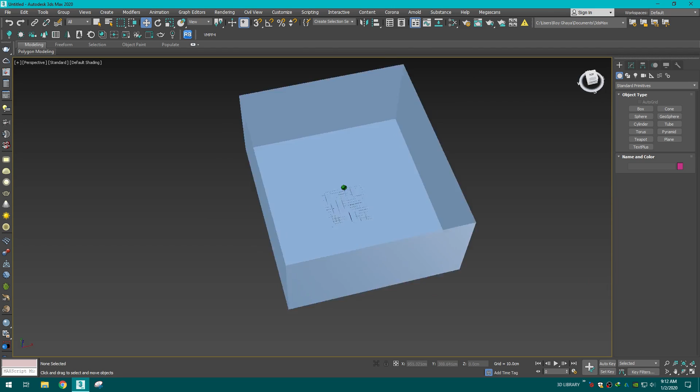Okay, so to my downloads, and of course I'll be leaving all the links for you to download all the materials and all the models that I'll be using in this video. I'm gonna grab the free bed here.

Make sure angle snap tool is on. You can press A on your keyboard, E for rotate, and we're gonna rotate this for 90 degrees. And of course group it to bed.

Now to our camera here, we're gonna select Corona camera and align it. Press Shift F on our keyboard to enable safe frames, so I can see the frames that I'll be setting for the camera. Make sure Corona renderer is set, and go to common, and let's have some space in our image.

We can see here that our camera is very close to the bed, and we don't want that. We need more space for our interior so we can show our full space. So we're gonna go back to our camera, select our camera here.

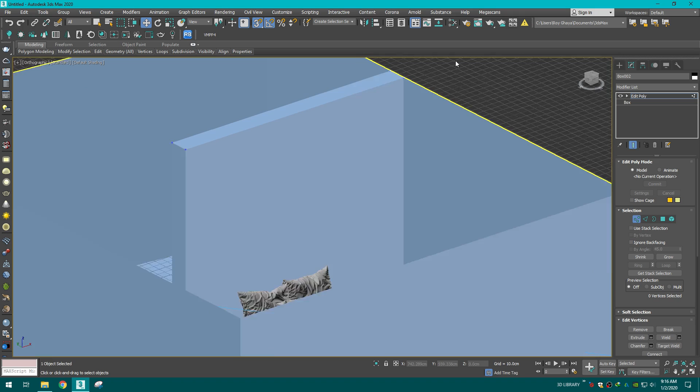So we're gonna select the vertices here and align it to the top, and those vertices here, I'm gonna align it to the edge here. Now we can see that it's perfectly aligned, and we're gonna make this a little smaller, something like this.

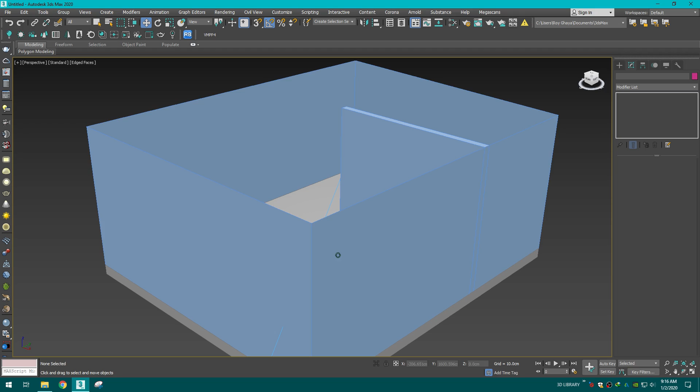Now we're gonna need some openings here, and before we do that, we're gonna detach the floor. Let's name it floor. Select it, and let's shell this floor to something like 20. Assign a different color for it, and a different color for the wall.

Now we need some openings here. So I'm gonna grab those edges here, connect them. Let's say we need 3 of this. And this one would be a little smaller here, and leave some space for the wall. So I'm gonna grab the first one, second one, and third one.

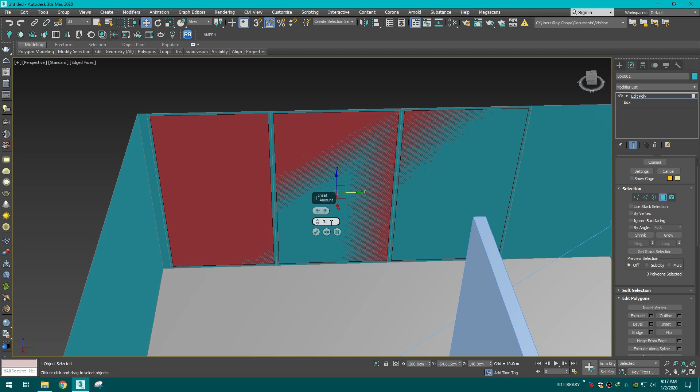And I make sure I inset by group, so I have to hit this button here. And let's inset to something like 3.75, let's say, and hit OK. Now we're gonna extrude them to something like 10. And of course, delete them.

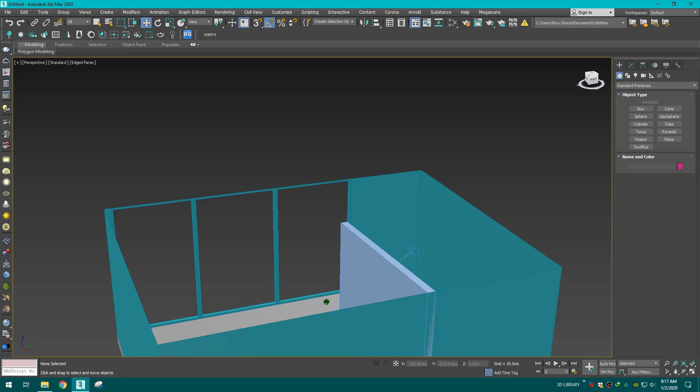Now we have some openings and the basic model so far. We're gonna copy this to make the roof. So we hold Shift and drag it up. Make sure it's a copy and align it.

Now I need an opening here for the curtains, so I'm gonna grab an edit poly. It's not necessary, but sometimes I like to have more control of it. A box above the openings here. Make sure the box is way above, but it doesn't touch this or go beside it. So it's gonna be something like this. You can see it from the interior here.

Now we go to compound objects, select Boolean and subtract, so we can remove this box here and select it. Now from the front view you can see now that we have an opening in our roof. Let me isolate this so you can see it clearly.

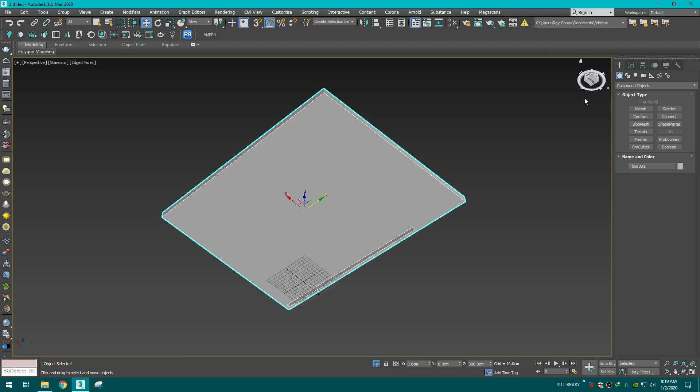This is our window openings here, so they can fit inside. Unhide all and back to our camera angle. Let's delete the box, of course, and make sure we save.

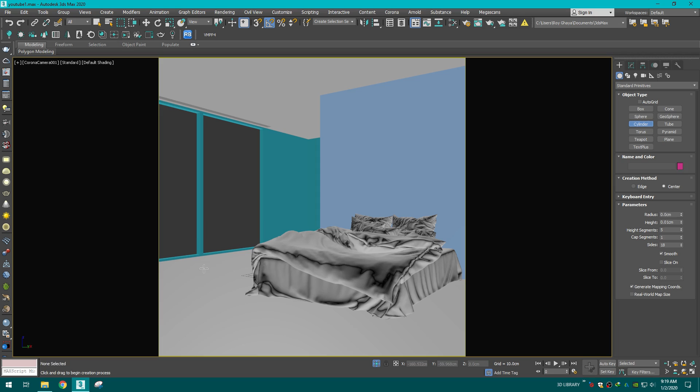Now I'm gonna select cylinder here, and let's make a cylinder. And move it to here and copy another one as instance to here. Maybe a little further, something like this.

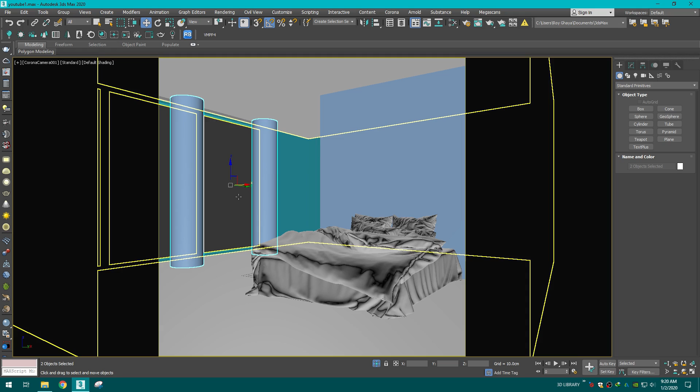Alright, and of course make sure they align to the wall, so we're gonna edit poly, select the vertices, press S to snap, and align them to the wall here.

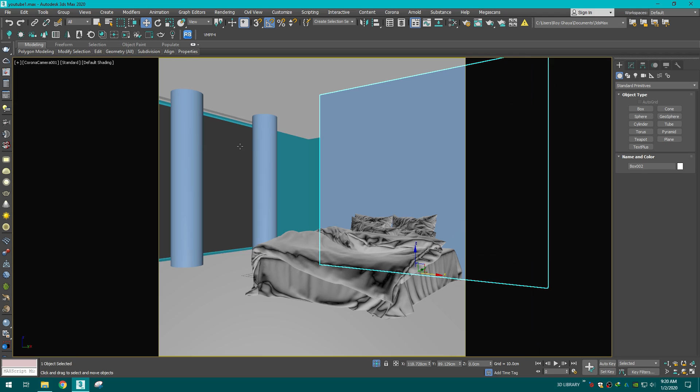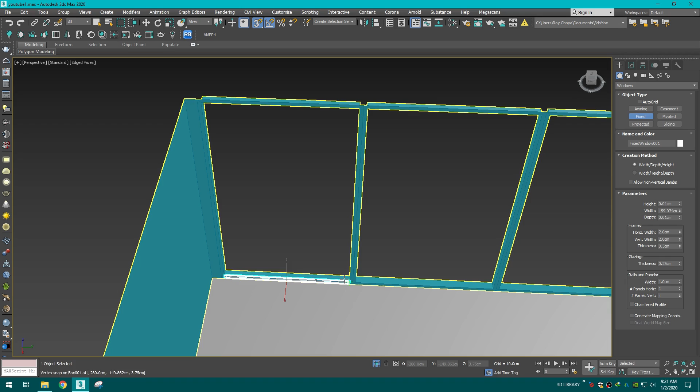Now we have our basic model, but we're missing the windows. So we're gonna hide the roof, hide those two, go to Windows, select Fixed, make sure Snap is on, and we're gonna create the windows here. And here we have our 3 openings.

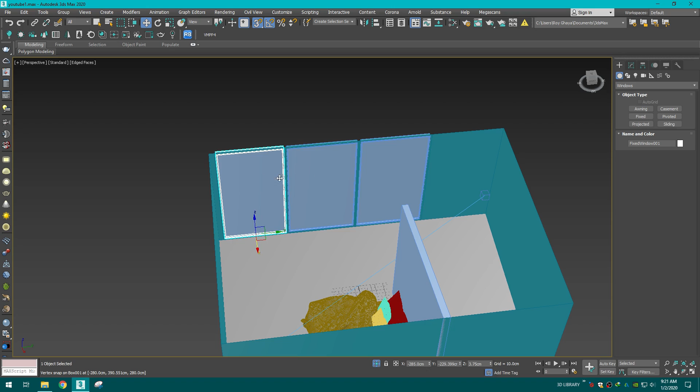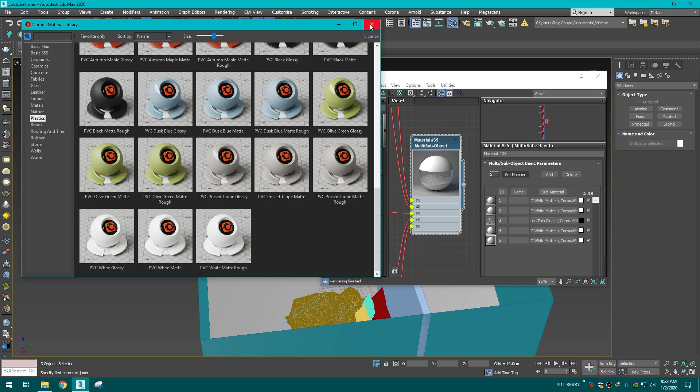Now I'm gonna select those windows here and go to my material editor to assign the material for it. So we're gonna grab a multi-sub object, set the number to 5, and go to our material library here from Corona. Go to the glass, assign a thin glass material to number 3, and go to plastic, assign a PVC white matte to number 1, 2, 4, and 5, and assign this material to our window. And of course UVW this to box real world scale.

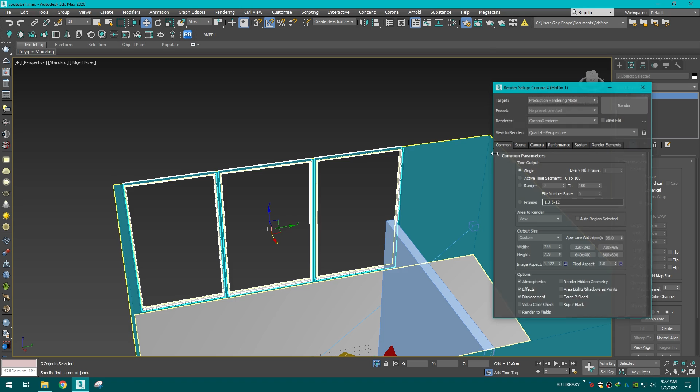Alright, now before we start the interactive and set up our light in our scene, we need to exclude the windows from the material override. So to our render setup, we press F10, go to scene, select material override, and select a basic Corona material, and hit the plus button here to exclude our windows so light can go inside our scene.

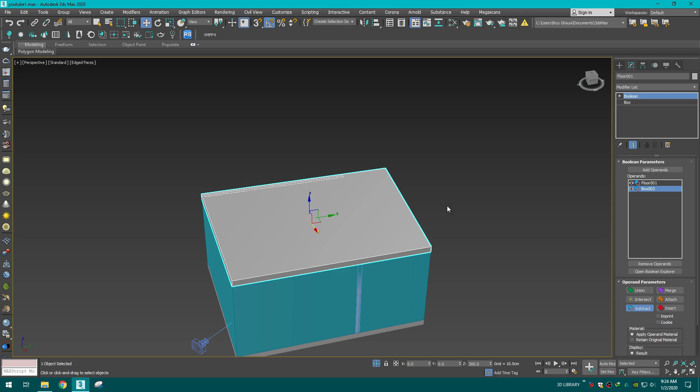Alright, so this model is from CGMood and I'll be leaving the link of course for you to download. And we're gonna merge it in our scene and delete the ones that I don't need, so we won't be needing those. I'm gonna be needing this one only, but I'm gonna change the materials from the Corona material library to a curtain material, so we're gonna select this one here.

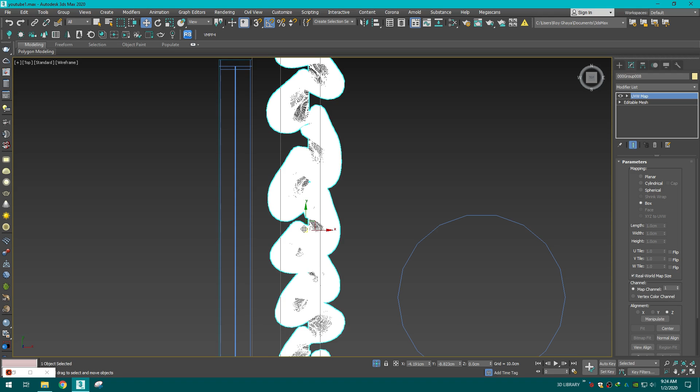And make sure of course to UVW this as real world scale. Now move the curtains to here, okay, and in front view make sure they're perfectly aligned. First let's align them to the floor so they won't be flying. Set position to minimum and maximum.

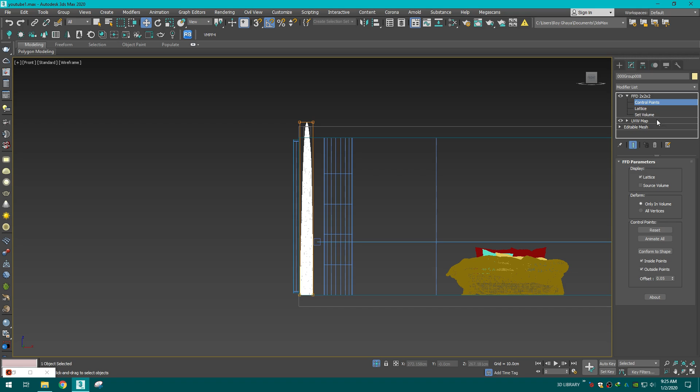Okay, unhide all and make sure you FFD this to 2x2. Select the control points and move them down the opening correctly. Alright, now we can copy this as much as you want. As a copy, let's say.

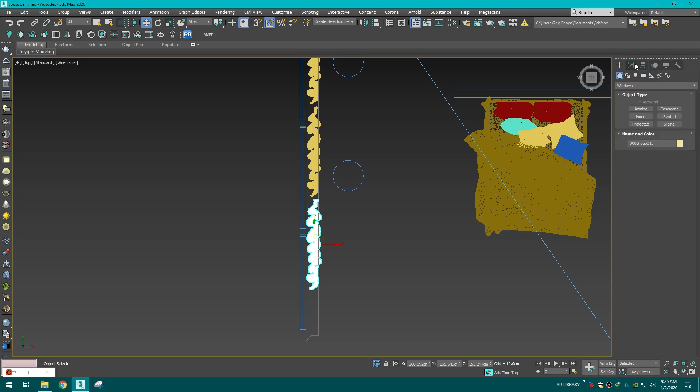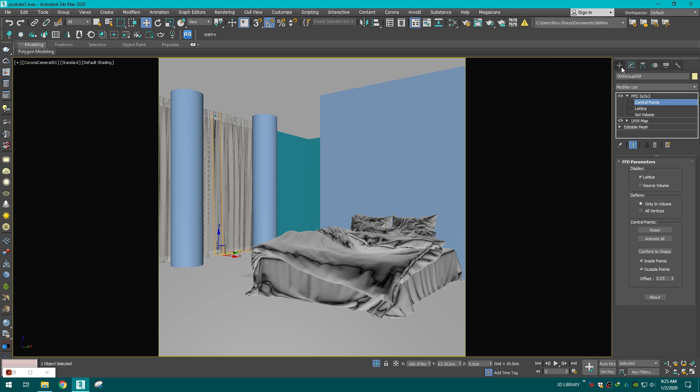Here we have our curtains and our scene. Here we go. And of course, let's exclude those 3 actually, again from the material override, and hit unhide all and fire up again the Corona Interactive.

We can see here that our light is very dim because we don't have any lighting source but our single map here from Corona without even Corona Sky. For this scene we're gonna be using a HDRI that I downloaded, and we're gonna go to Corona bitmap, select the HDRI that I've downloaded. Here it is. We're gonna open it and make sure the environment mode is set to spherical. And I'm gonna grab also a Corona color correction and assign the HDRI to it to have more control to our HDRI and lights. We're gonna go here and assign it in our environment tab as instance.

Okay, now we can see that our scene is more dim, and here we're gonna start with our changes. So go to Corona color correction, and here you can see HDR adjustments, and we're gonna give it more exposure, so maybe set this to something like 5, let's say. Alright, let's switch 7.

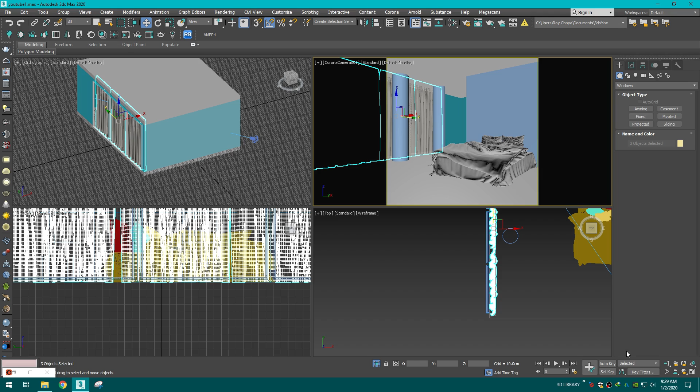We're gonna be focusing more on adding more light sources to our scene. So close the material editor and maybe add the sun to our scene. To see clearly, we're gonna maximize our viewport here, hit the plus button, select configure viewports, go to layout, and select the style here and make sure both of them are Corona camera 1.

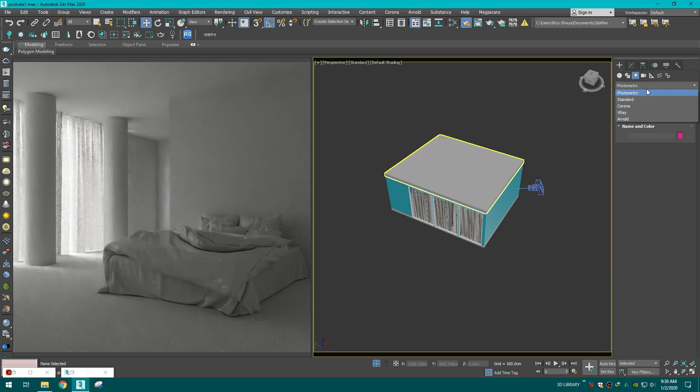Hit apply and OK. In our render setup tab, we're gonna select this viewport here. You can see this brown safe frame up above, and we're gonna lock it. Inside here we hit Corona camera, extended viewport, and we're gonna start Corona Interactive and click to start it. Now I'll be having more control inside or outside, where I can position my sun to the liking that I want.

So Corona sun, click and drag, and we're gonna find the nice position to our scene. Maybe give the curtains a little bit of space so light can shine through inside. Select the other curtain here.

Alright, now we can see that light is coming inside our scene, but it's too bright and shiny and we don't need that. So we're gonna select our Corona sun, decrease the intensity to something like 0.08, let's say, and increase the size of it to something like 24 so we don't get those sharp shadows.

Alright, and of course we're gonna disable generate caustics, and maybe decrease the intensity a little bit more to something like 0.04, let's say. But fix this curtain here because I don't want this much light inside from the sun. Okay, so it's gonna be something like this.

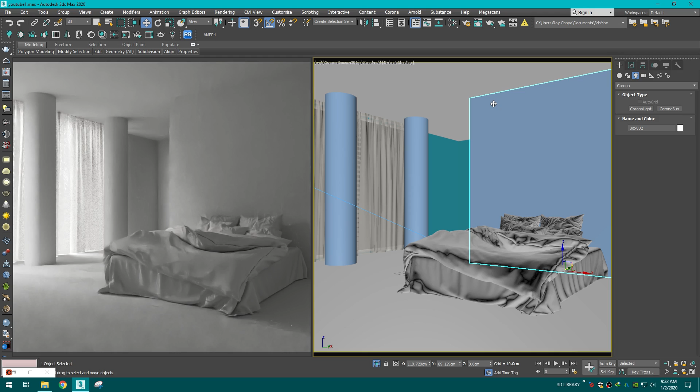Now we're gonna start with the wall material here, but before we do that we're gonna add some realism to it. So let's grab our box here and attach it to our wall, and attach all of this to our ceiling. Now you can see we have this as one object.

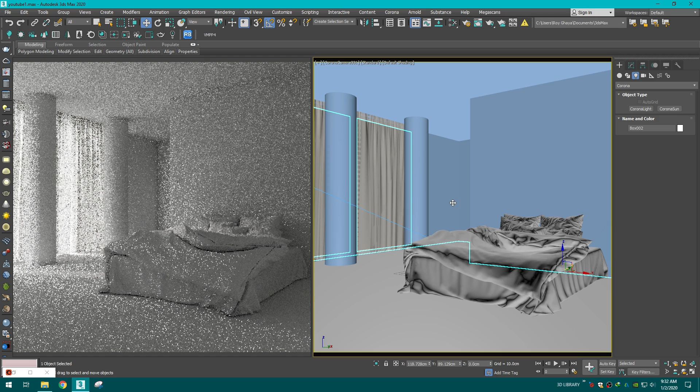So we're gonna disable the Corona Interactive here and we're gonna make sure to save before going to the next phase.

Back to our material editor, we're gonna grab a Corona material and a Corona bitmap, and select our texture, assign it to our diffuse and preview it so you can see it clearly.

Basically it's a simple polished concrete, but we can see that it's super flat and we don't have any bumps or imperfections to it, and we do need that. So let's minimize our 3ds Max and select our texture and add it to Photoshop.

Now in Photoshop we're gonna create a normal map so we can have like dents and bumps into our material so it will look more realistic. So in Photoshop we select filter, go to 3D here, and assign generate normal map.

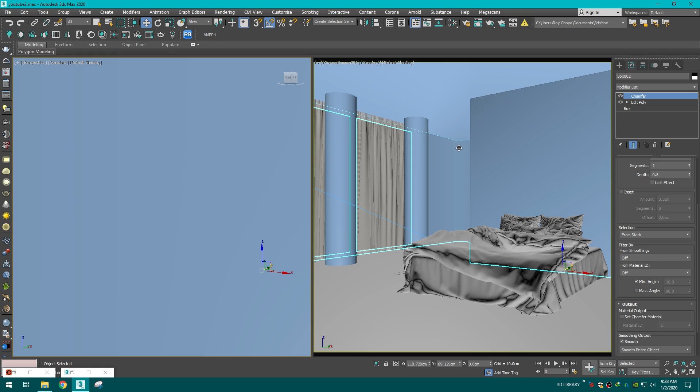Okay, so I think this would do. And we're gonna assign this material to our wall. But before we do that, we're gonna chamfer this wall so we can have more realism to it. I'm gonna zoom in here, press F4 to see the edges. I'm gonna increase the segments to 3. Make sure that its smoothing is going for the unsmooth edges, and we're gonna chamfer smooth the chamfers only. Okay.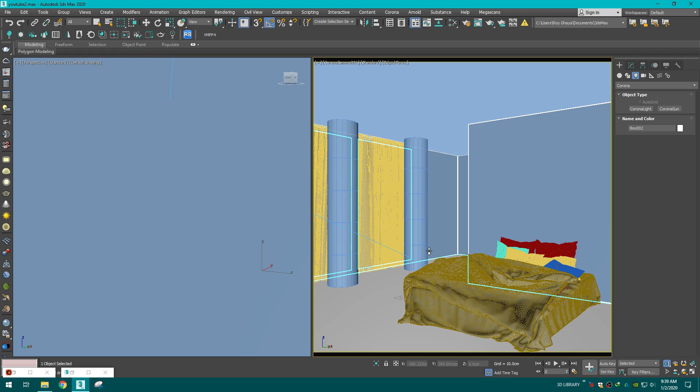Now back to my camera here. I'm gonna assign the material I just made. I'm gonna call this wall material. Okay, and we're gonna assign it and make sure it's shaded in our viewports. Go to the top, assign a UVW map as a box, and make sure it's perfectly assigned everywhere.

Okay, now back to my render setup, we're gonna disable this from the material override and check it in our interactive. If you see this white image here, you gotta disable the lock from the render setup. Okay, the texture seems pretty fine and it's looking pretty good. And maybe decrease the chamfer here to an amount of 0.5 and segments of 2. Okay, much better.

Now let's go to contrast and increase the contrast to something like 3 and select a LUT for an image. And increase the LUT to something like 0.2 or 0.3. Alright, we can see that our image has turned into a yellowish tint again. That's because our material here is a bit yellowish, so we can select again a Corona color correction and assign it to our diffuse map and decrease the saturation to something like -0.5. Much better. Alright.

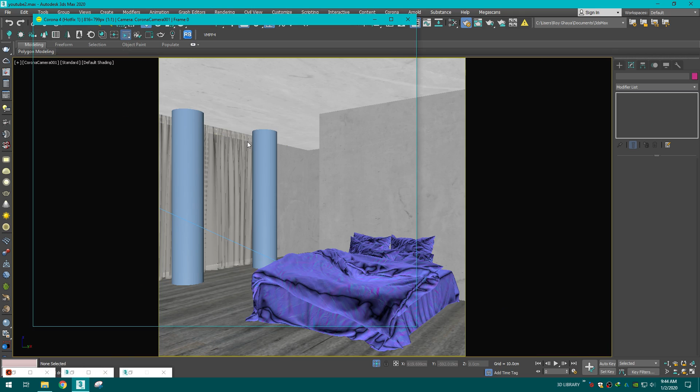now let me increase the sharpness a little bit so I can see clearly, and maybe add a bit of corrections to the scene here. So maybe increase the filmic shadows to something like 0.5, add the vignette to something like 0.6. Okay, much better. Let me check that light leak from here. And fix the light leak. Always check for light leaks. Alright.

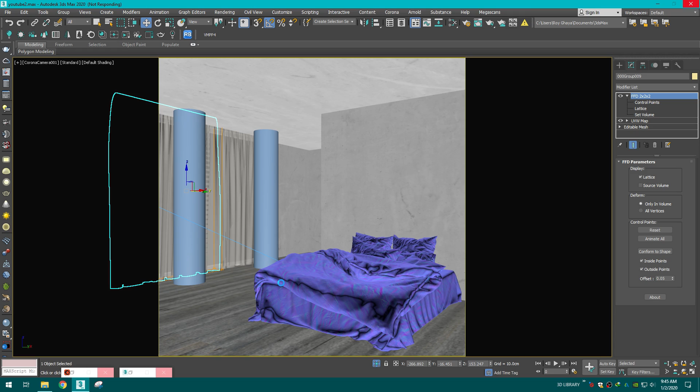Now, I'm gonna be adding the other models to my scene. I'm gonna be adding one model. Okay, so it's gonna be the plants. Before doing this, make sure to always save. Okay, we're gonna merge this into our file. Alright, here we have our models merged, and that's a heavy one, of course.

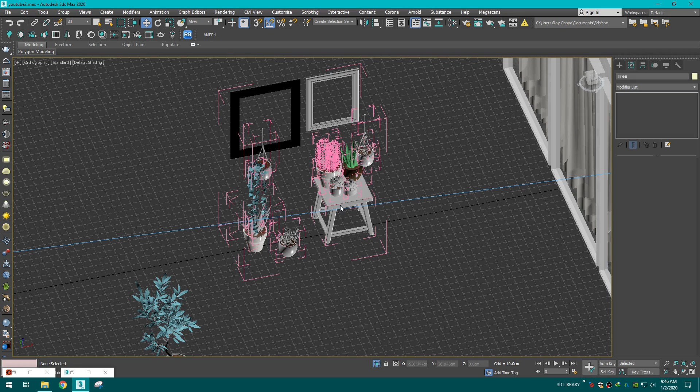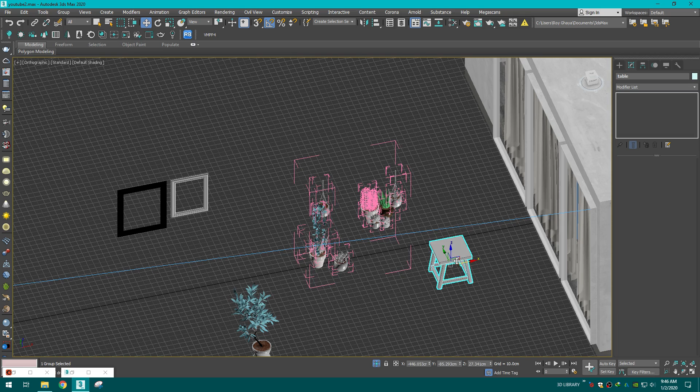I'm gonna take it here. I'm gonna pick the models that I'll be needing in my scene. So, select it, group, open, and select the models that I want. Take them away, detach, and group them. Of course, I'll be needing those two here too. Group, detach, group again. I'm gonna be needing this table here. Again, group, detach, and group it. Right, and I'm gonna delete the other unnecessary objects.

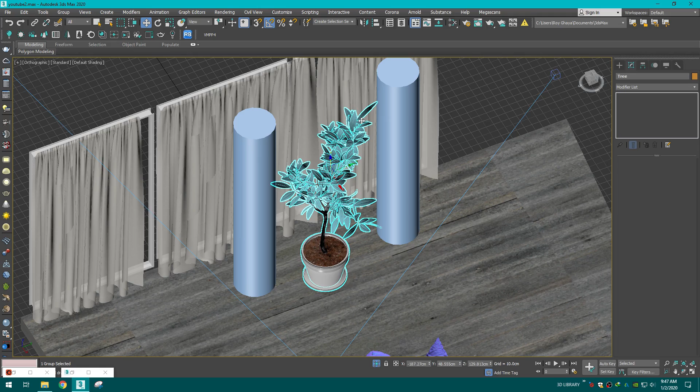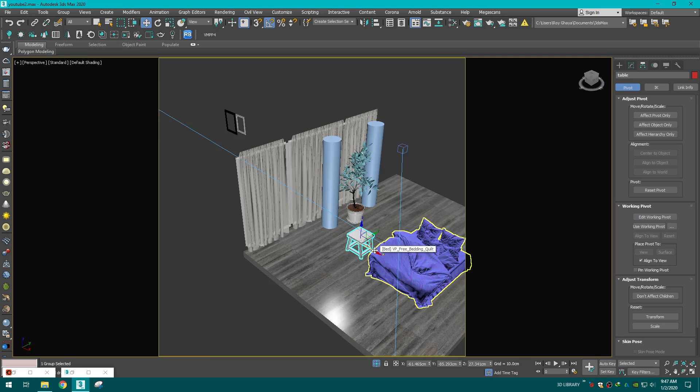Okay, so hide selection, this goes here. We're gonna scale it by pressing R on our keyboard, something like this, and we're gonna align it to our floor. Make sure the pivot is on the center. And I'm gonna align it. Minimum, maximum to the Z. For my table, it's gonna go somewhere here. And for those, they're gonna be behind the bed. So unhide all. I'm gonna scale those two here and make sure they're aligned to my wall.

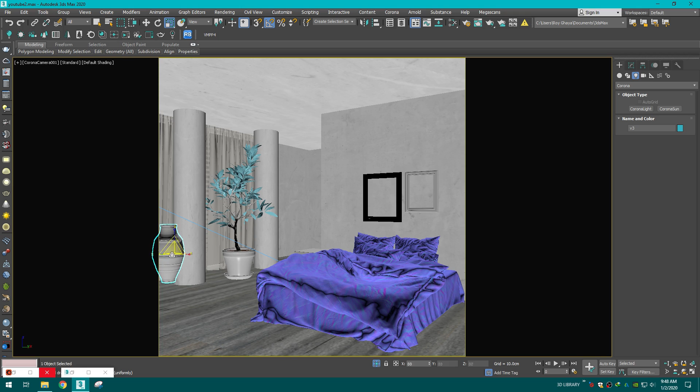The table is gonna be somewhere like this. Move the bed a little bit. And for those two cylinders, we're gonna assign the same material that was on the wall. Alright, now I'm gonna grab the other models. I'm gonna merge them again in my scene. Okay, I'm gonna grab, assign them here, scale a bit. And grab the others too.

And scale them down. And here we have it. One more here, rotate it. And here we go. And of course, assign all the missing textures. Alright.

One more thing here. I'm gonna be needing a desk. So I'm gonna be drawing a little box. Okay. And select an editable poly, of course. Select the vertices, snap on, align it. Here we go, something like this. Alright. Grab that box.

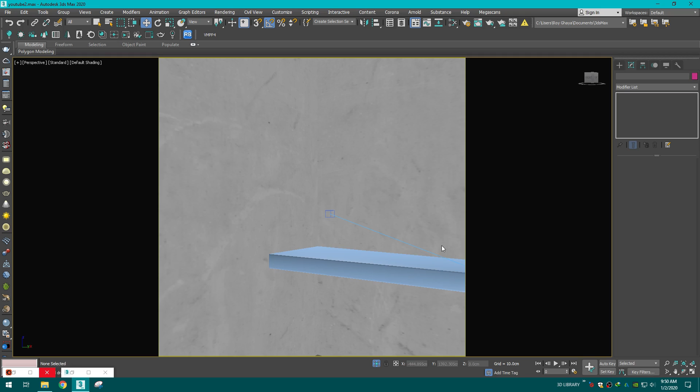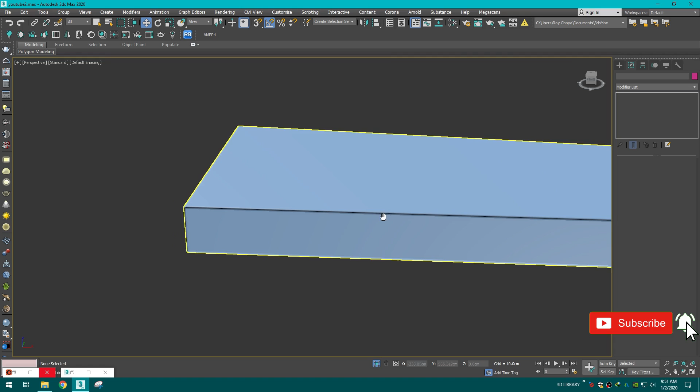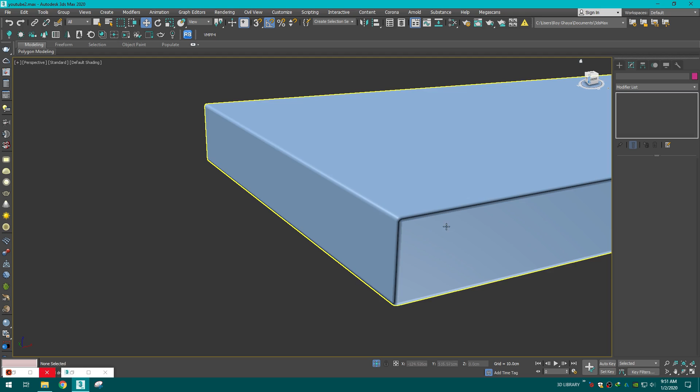And of course, add a chamfer to it. To an amount of 0.5, segments of 2. Unsmooth edges, smooth chamfers only. And if I zoom in here, we can see that we have nice smooth edges that will be looking realistic on our render. The reason I do this is because in real life there is no 90 degrees or a perfectly done angle. Even a small paper has some imperfections to the edges. So here we go, maybe a smaller amount of 0.02.

Alright, now I'm gonna assign a material for this. So Corona material, Corona bitmap, and select our bitmap here, assign it to our bump, and give it a bit of reflection with lower glossiness, of course, and assign it, show shaded again, UVW as box, and have it sit perfectly here.

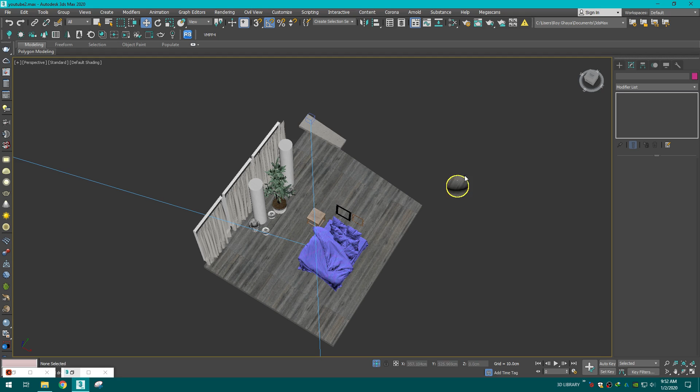Okay, so as you can see guys, the process is really easy. All you have to do is learn the basics and you can go on and start making your own scenes that will be looking realistic.

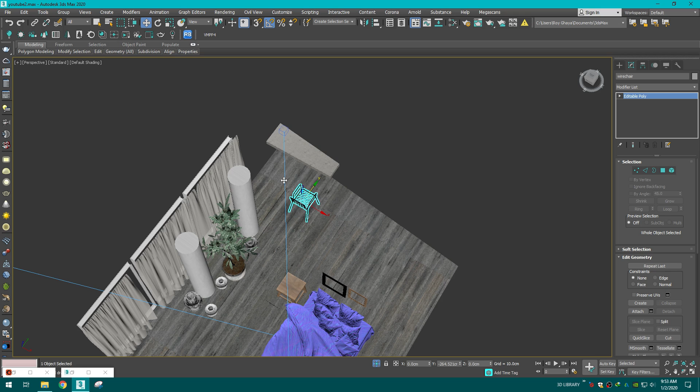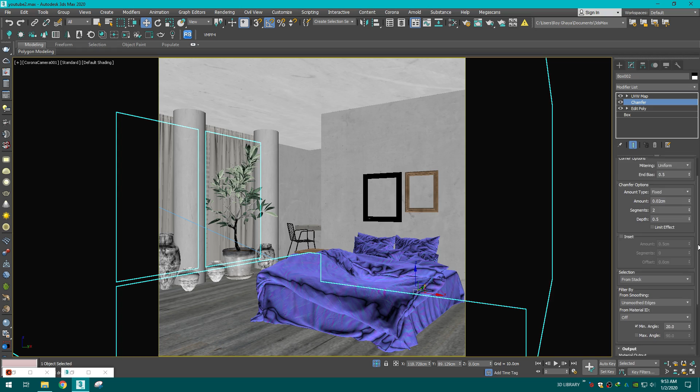Okay, now to our final model here, we're gonna be adding our chair, also downloaded from CGMood. Here it is. Alright, to my camera angle, I'm gonna rotate this to something like that. Bring this lower. And here we have it. Alright. Now let's fire up again our interactive so we can see the objects in our scene. Alright.

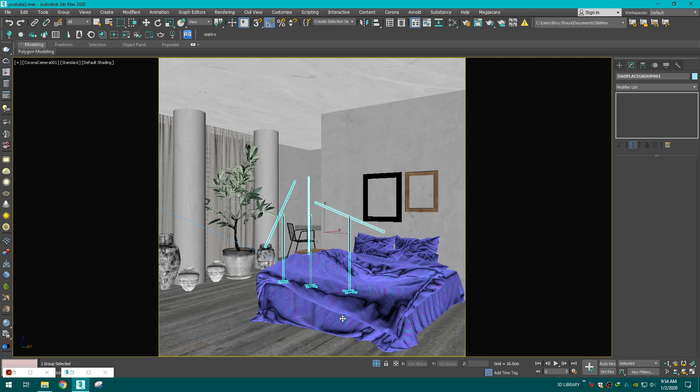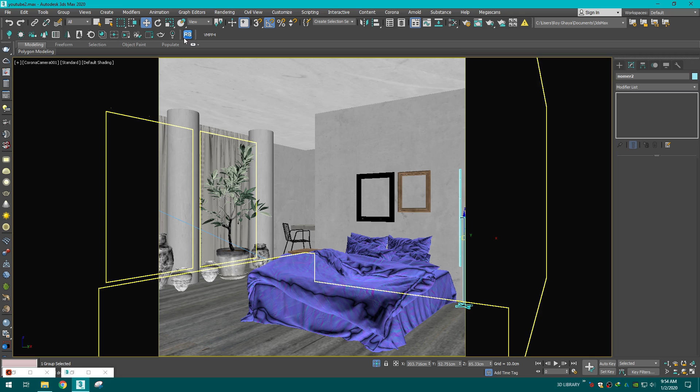Now I forgot something. We have our light here next to our bed. So this will be the final object. I'm gonna select this one here. Okay, and move it next to my bed. And make sure it's aligned to the floor. Okay. I suppose that all bitmaps are here.

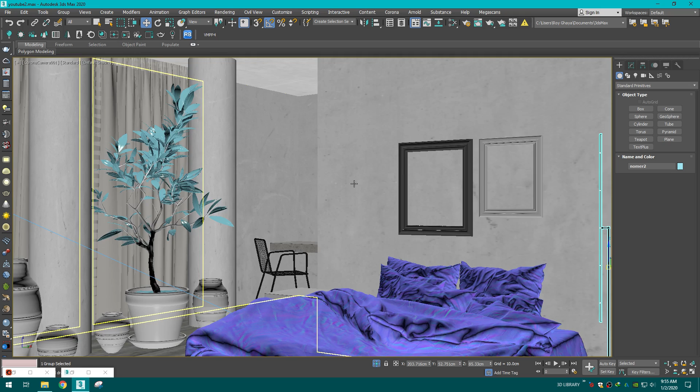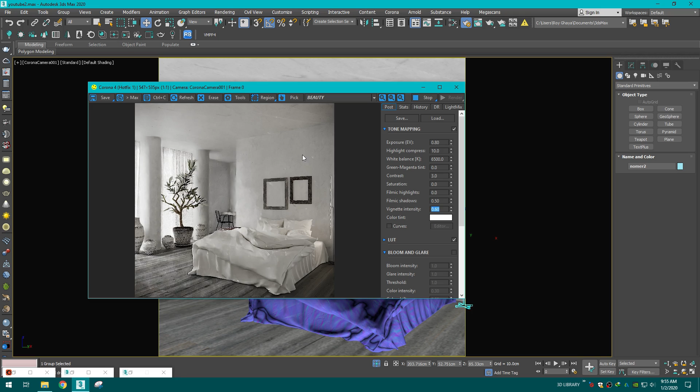Now we're gonna convert everything. We'll make sure there's no V-Ray materials in our scene. Save this again. Okay, and make sure that we convert all bitmaps to Corona bitmaps. Alright, now let's disable material override and hit interactive so we can see the scene. Alright, it's looking pretty great. And now I'm gonna be adding a few touches here and there so we can make it look perfectly perfect.

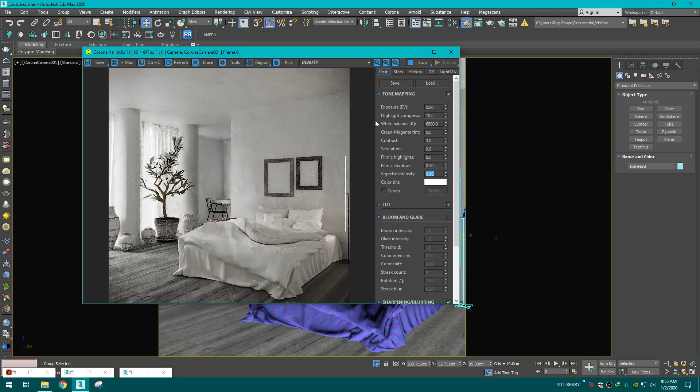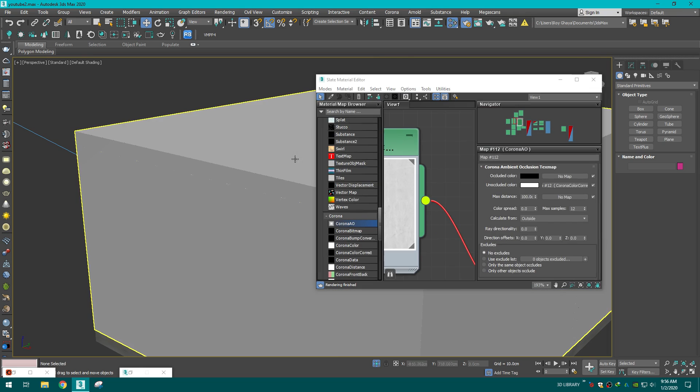Alright, now you can see that the edges here are a little bit weird and I need them to not only have some chamfer to look more realistic, but maybe add some black tint to it. So let me go back to my material and I'm gonna grab a Corona AO here. I'm gonna select this to Unoccluded Color and assign it to my diffuse. You can see that we have a small black tint here, and I'm gonna show you this in interactive real quick.

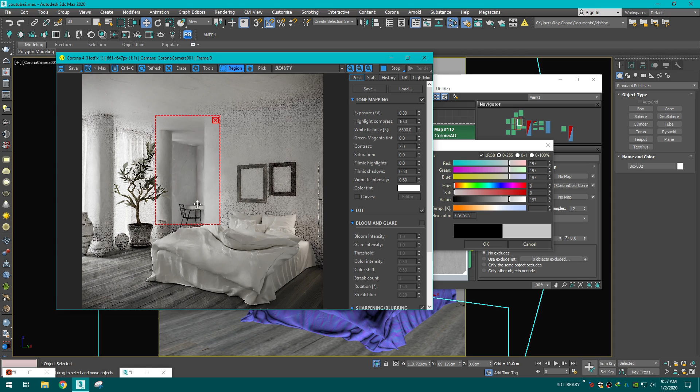So here's my interactive, and you can see now that we have black edges all over the scene, but we don't need it to this extent. So all I have to do is decrease the max distance to something like 0.2 and make sure the occluded color is a little less, something like this, let's say. Maybe more. Alright, now the shadows look a lot better in the corners. And I'm gonna hit OK.

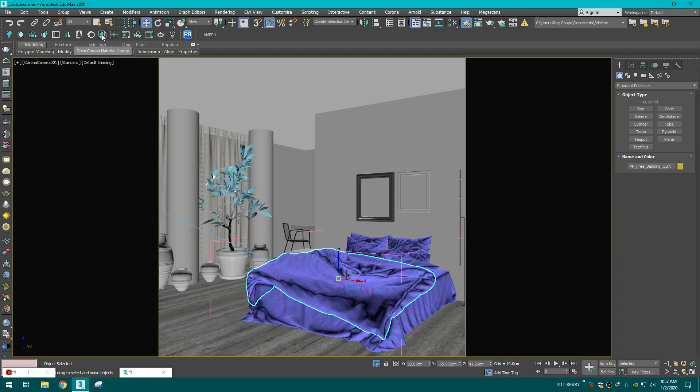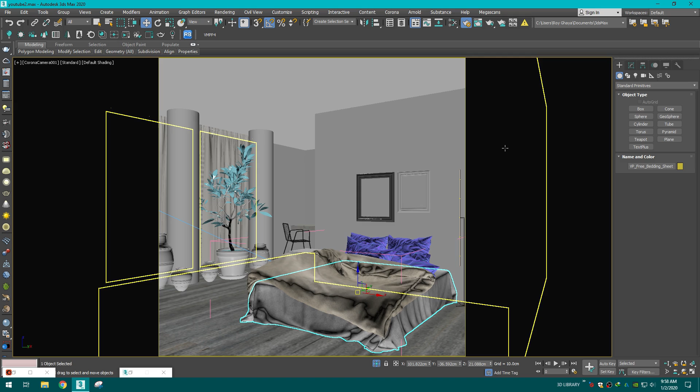Back to my bed here. I need to change some materials. So I'm gonna grab this, go to our ready material library from Corona, and it's just that easy. So I'm gonna assign fabric cotton to the cover. For the other cover, I'm gonna set the other fabric cotton lampshade. I'm gonna go to material editor and make this a little bit different from the other. So grab Corona color correction again and desaturate it a bit to something like 0.7. Alright, and hit interactive again to see where we're at now. Much better.

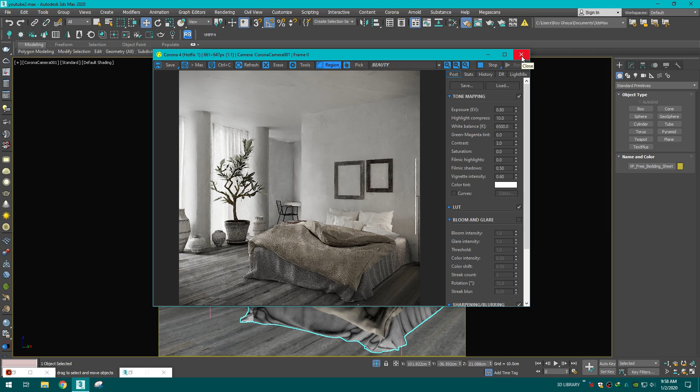Okay, now we've come to our final process of the image before post-production. So I'm gonna close this, set up Corona Interactive LightMix, and we're gonna select Generate. This will help us create our night mode. So if I go to Interactive, you can see that LightMix has been activated here, and I can control every light in my scene. This will help us create night mode without changing any light in our scene. So let's render this to final before moving to creating the night mode and of course post-production.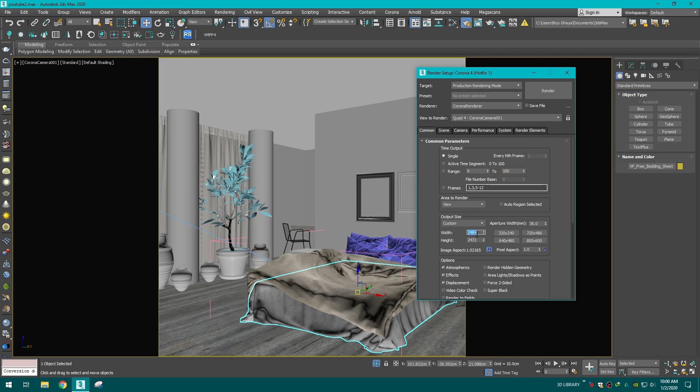Alright, now that the rendering's done, we can see that the image is a little bit too exposed and there are some lights that we need to turn off in order to create a daytime image. So starting with light mix, we can disable the light here. Alright, and we need to set the correct colors for our environment, which is kind of blue, something around 7,000, let's say, and the sun will of course cast a warmer color.

Let's take it up to something like this, 4,500. Okay, you can see we have a warmer tone here and the scene is looking like it's daytime.